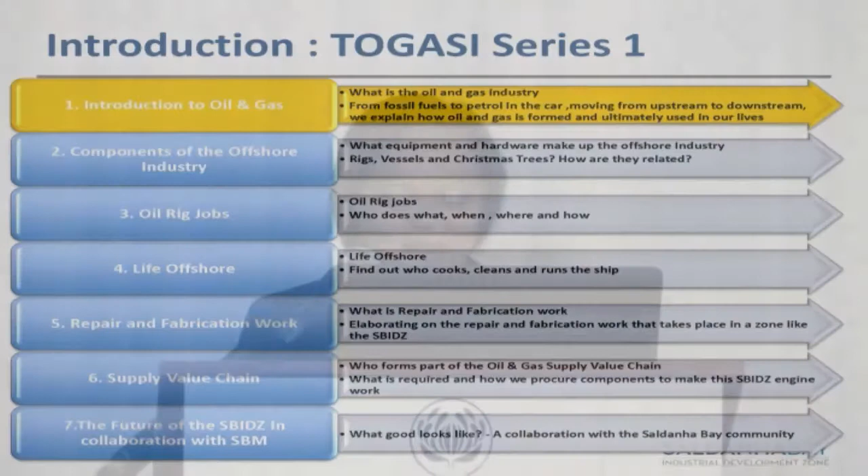Before I go on, Abby has already alluded to a little bit of some of my background, but I thought I would just give a personal mini biography of what qualifies me to stand here before you this morning.

I'm born and raised in Durban, a coastal town, so I do have a natural flair for seaborne trades, which can be lumped into marine, into maritime, and then with my experience it became also oil and gas. That's the other reason that has kept me going in the industry, and why I'm really looking forward to sharing this knowledge, as I find the seaborne trades, the marine, maritime and oil and gas industry very fascinating.

My background is in chemical engineering, so I moved to Cape Town to start my degree, and in my second year I received a scholarship to go to Germany to do part of my studies.

The reason I mention that is it opened up my eyes, and I realized I do not only have to limit myself to the mining sector, or just the petroleum refinery industry, or some of the other smaller companies that take up chemical engineering graduates, but there was a whole big world out there of so much else one can do with any engineering degree, but more specifically a chemical engineering degree. This is also a strong motivator, because through these talks that is exactly what we're trying to achieve, since sometimes the view is only limited because that's all we're exposed to and know.

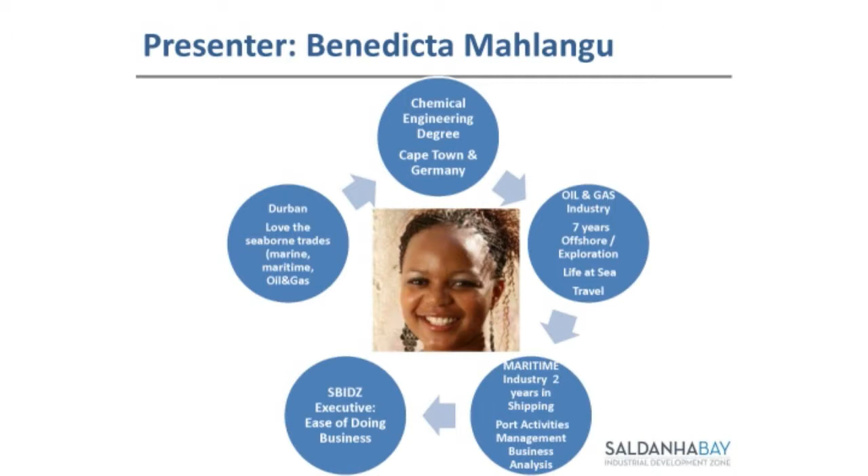This portfolio is to design and implement a model that allows our investors and business owners who operate within the zone to focus on their core business and not have to hassle about peripheral things like permits, visa issues, and processes of how to get their rigs in and out. It's about a model allowing seamless flow for someone coming to do the work they need, finding the parts, finding the workmanship, and getting out in the time designated to meet their further obligations.

That's enough about me. We now get on to real business, which is what is oil and gas. I'd like a show of hands to gauge the audience we have here today. How many people know about the oil and gas industry? I'm talking with regards to formation or rig work in a technical sense. A few people, okay, then I'm in the right place.

How I've structured these is I put in videos, very short animated movies. The reason being, it's much easier to get the visual of what happens sub-level with regards to oil and gas drilling and exploration. So without further ado, I'll start with the first video and then talk more into it after.

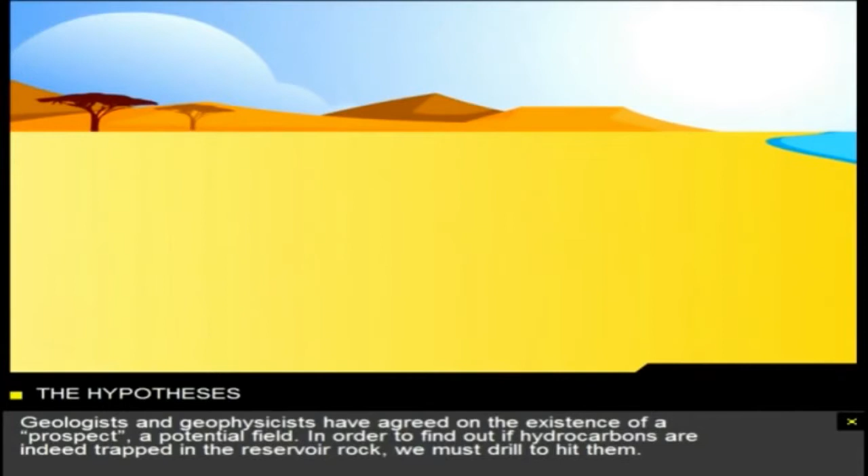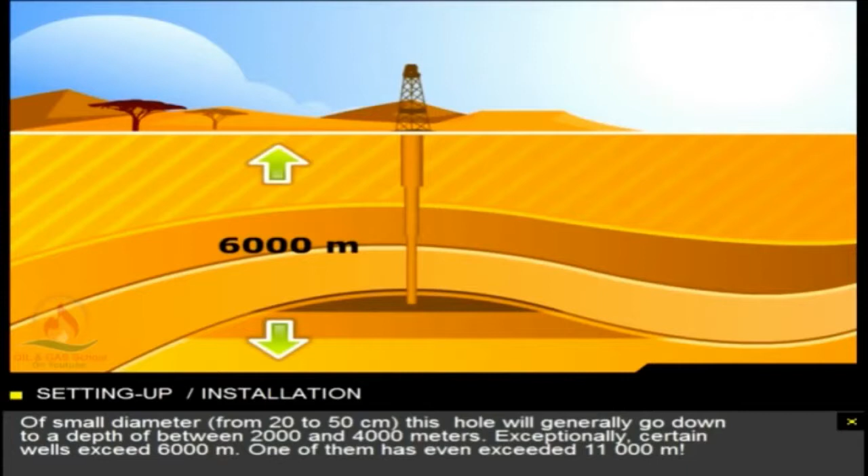Geologists and geophysicists have agreed on the existence of a prospect, a potential field. In order to find out if hydrocarbons are indeed trapped in the reservoir rock, we must drill to hit them. Bearing in mind the knowledge acquired about the substratum and topography of the land, the best position for installation of the drilling equipment is determined. Generally it is vertically above the point of maximum thickness of the geological layer suspected of containing hydrocarbons. The drillers then make a hole in conditions that are sometimes difficult. Of small diameter, from 20 to 50 centimeters, this hole will generally go down to a depth of between 2,000 and 4,000 meters. Exceptionally, certain wells exceed 6,000 meters. One has even exceeded 11,000 meters. Certain fields can be buried at a depth equivalent to the height of 12 Eiffel Towers. The derrick is the visible part of the drilling rig, a metal tower several tens of meters high. It's used to vertically introduce the drill strings down the hole. These drill strings are made up of metallic tubes screwed end to end.

That's just going through the various parts of the main frame structure that you would see, what we call topside of a rig. Although this is more of an onshore rig platform, it gives you the main components of what comprises the rig, which is the derrick, the drilling mud, and the pump that must be part of that structure and setup.

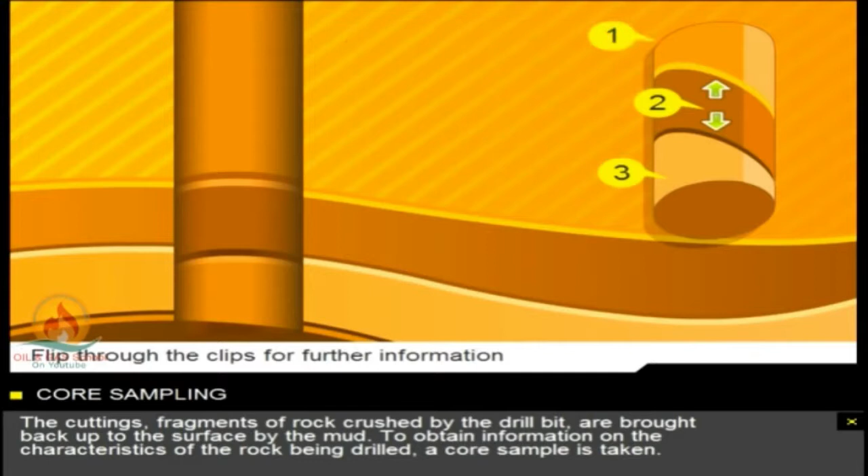And with each of these components within the drilling, this can last years in between. It's a very long process of testing and verifying and making absolutely certain you will produce actual crude oil that is usable.

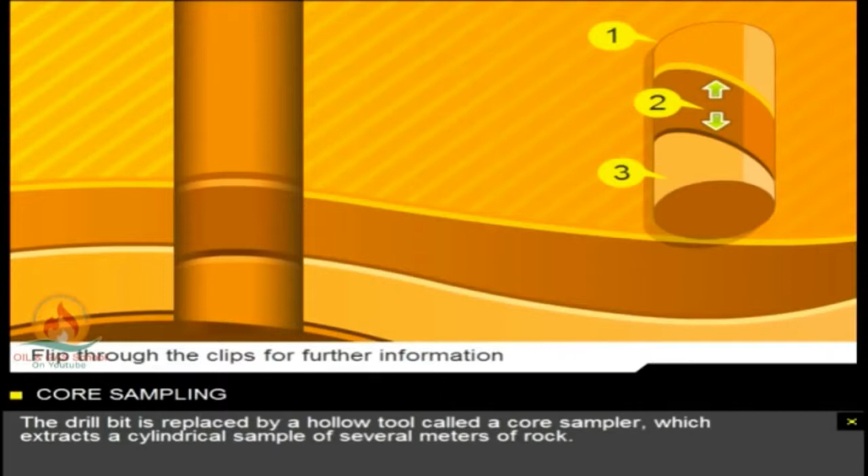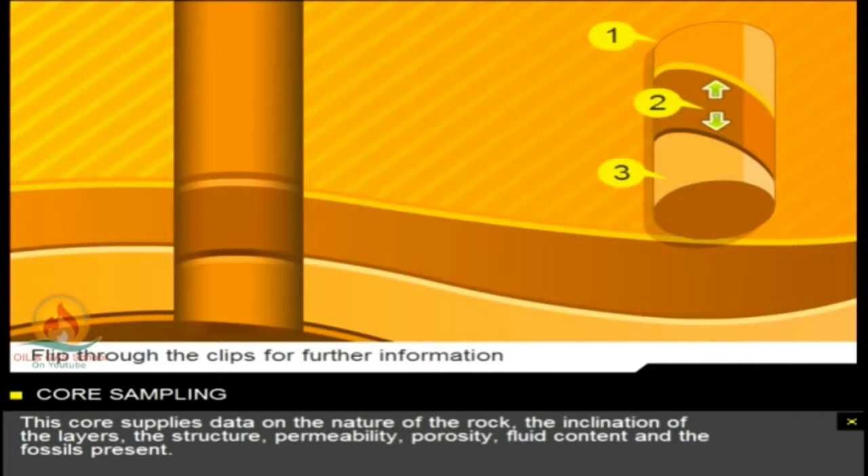The drill bit is replaced by a hollow tool called a core sampler, which extracts a cylindrical sample of several meters of rock. This core supplies data on the nature of the rock, the inclination of the layers, the structure, permeability, porosity, fluid content, and the fossils present.

After having drilled a few hundred meters, the explorers and drillers undertake measurements called loggings down the hole, by lowering electronic tools into the well to measure the physical parameters of the rock being drilled.

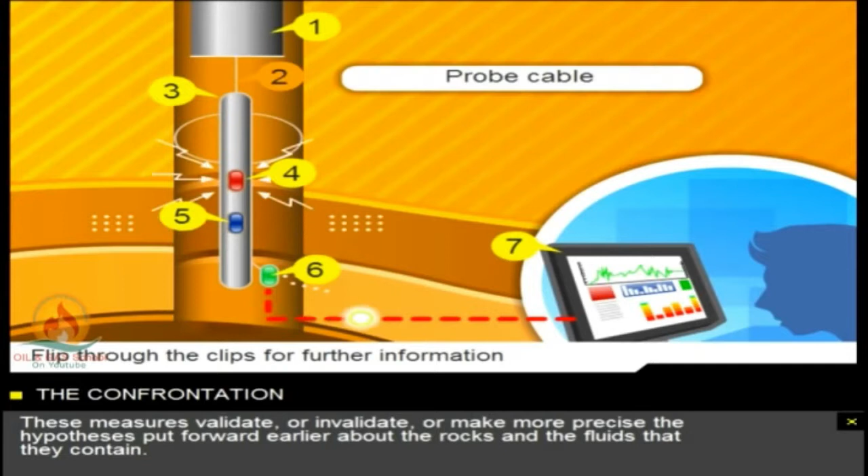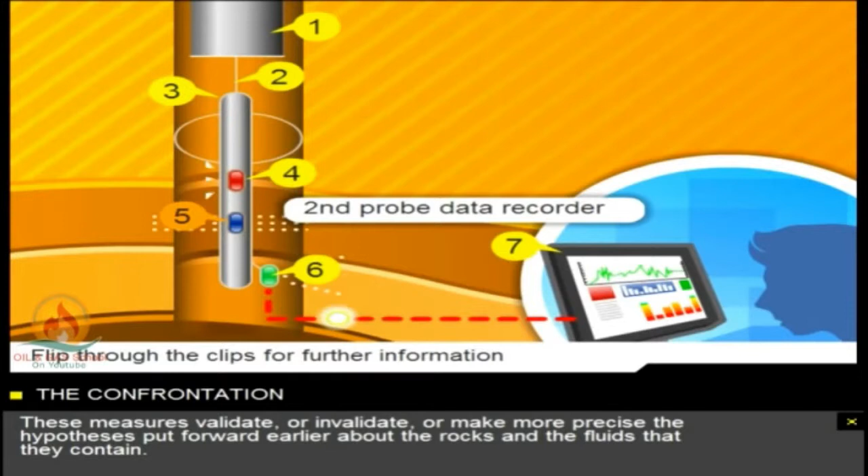These measures validate or invalidate, or make more precise, the hypotheses put forward earlier about the rocks and the fluids that they contain. The log engineer is responsible for the analysis of the results of the various loggings.

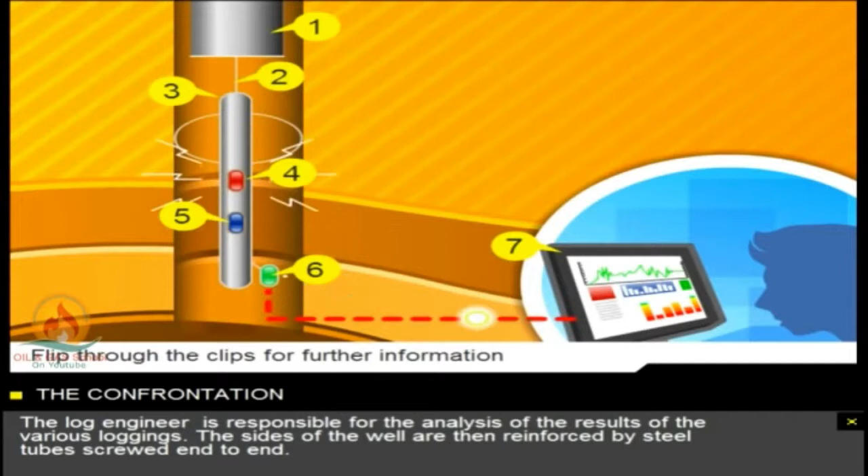The sides of the well are then reinforced by steel tubes screwed end to end. These tubes, called casings, are cemented into the ground. They isolate the various layers encountered.

When hydrocarbons are found, and if the pressure is sufficient to allow them to come to the surface naturally, the drillers do a flow check. The oil is allowed to come to the surface during several hours or several days through a calibrated hole.

You will see as I go through my presentation, crude oil is based around pressure and temperature.

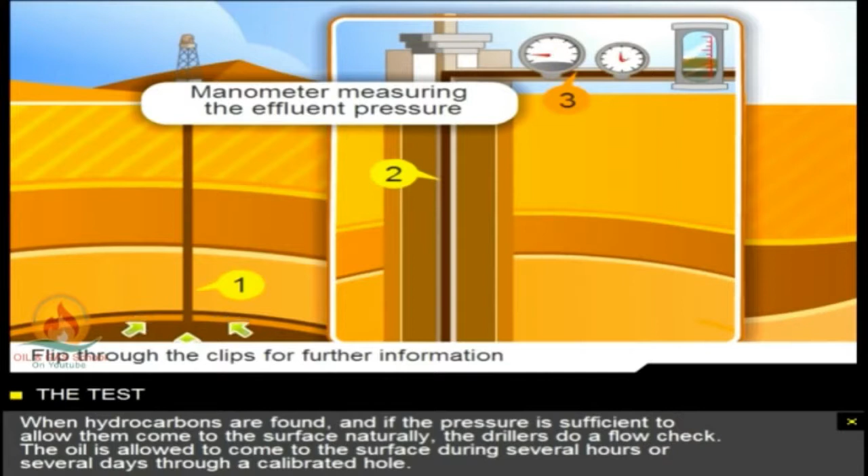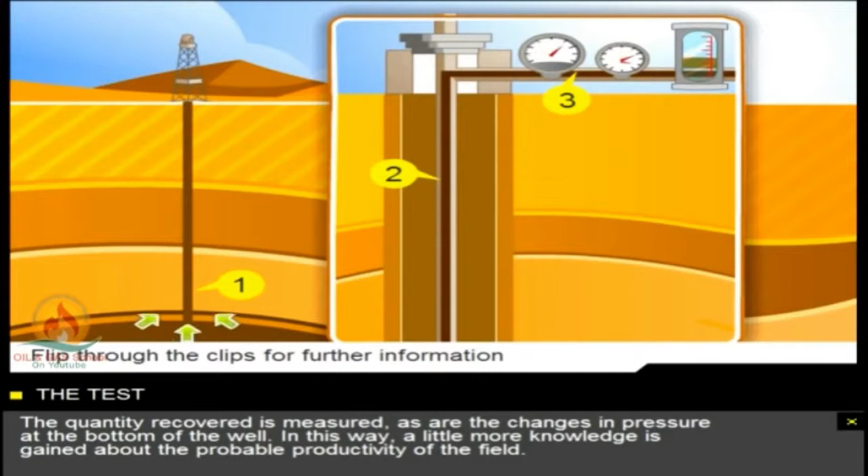The quantity recovered is measured, as are the changes in pressure at the bottom of the well. In this way, a little more knowledge is gained about the probable productivity of the field.

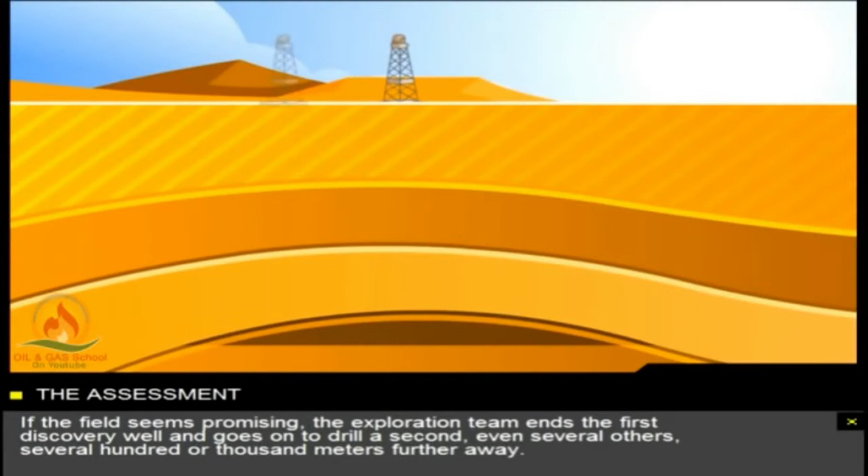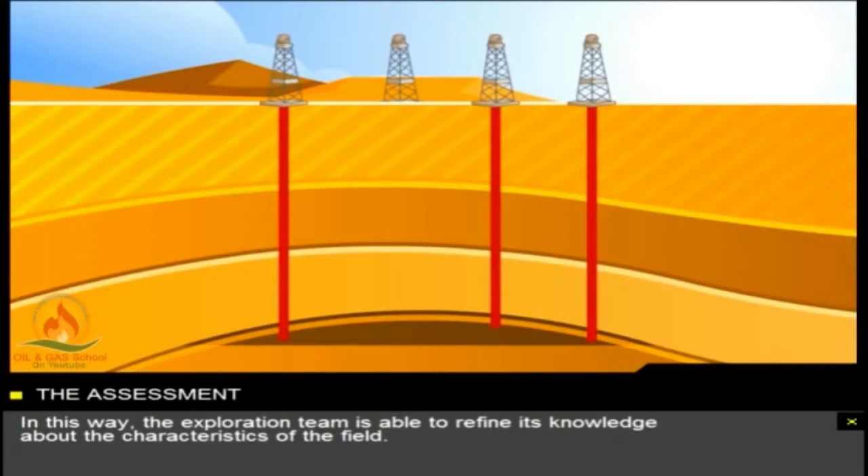If the field seems promising, the exploration team ends the first discovery well and goes on to drill a second, even several others, several hundred or 1,000 meters further away. In this way, the exploration team is able to refine its knowledge about the characteristics of the field. The decision to stop drilling is made only when all these appraisal wells have provided sufficient information, either to give up the exploration or to envisage future production.

I wanted to use this as an introduction, more of a schematic, and there is a lot of terminology involved with regards to the process that takes place. But the key thing to know is that it's a very long process timeline-wise, and there's a lot of specialists involved, from geologists, geophysicists, to drilling engineers, your well services specialists, people who only just look at the core samples and analyze that for some time to determine all the various properties that are required, necessary to deem that particular reservoir or well able to produce enough crude oil for it to be marketable.

I try to give a very simplified version of how crude oil is formed, and in essence, it is tiny plants, algae, and bacteria that died millions of years ago. They happen to just slowly deposit to the bottom of the ocean floor, which is the seabed, known as fossils, and they laid there.

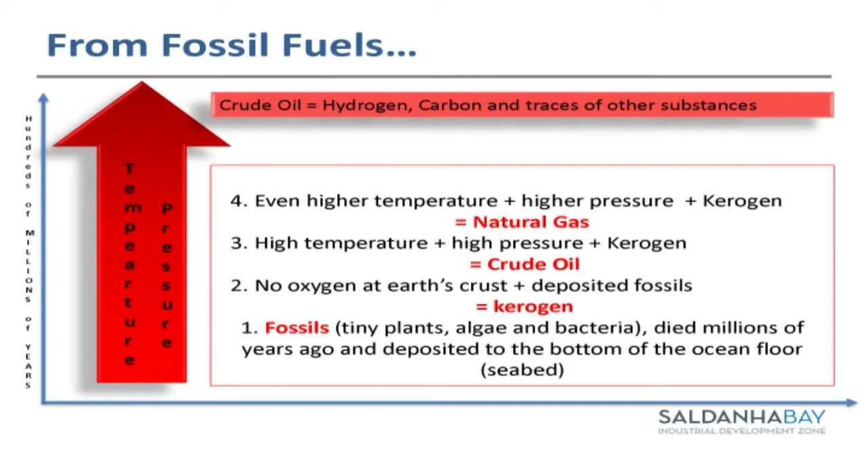Because at the core of the Earth's crust there is no oxygen, the combination of these deposited fossils with the lack of oxygen actually forms a compound called kerogen. The kerogen, with increasing temperature and pressure—because you can imagine there's more layers depositing, so the pressure builds up, and the temperature also increases because the core of the Earth is a very hot mantle—the combination of this is actually what forms crude oil. It's a very simplistic, in inverted commas, way of actually forming something that has so many more powerful uses in its end product.

And then with even higher temperature and pressure, it becomes natural gas. We know anything vaporizes and turns into a gaseous phase because of raised temperature or raised pressure. So that's what I mean by most of this being centered around pressure, playing around with pressure and temperature.

Also, what constitutes crude oil is hydrogen atoms, carbon atoms, and traces of other substances, one of them being sulfur. So how they term crude oil is when it's got a high sulfur content, it's known as sour crude oil, and if it's got a lower sulfur content, it's known as sweet crude oil.

The carbons in the chemistry are formed as chains joined together with hydrogen atoms around them. The ones with longer chains are known as heavier crude, and with fewer carbon atoms, known as lighter crude oil.

So if you hear in the news when they talk of the benchmark for crude oil prices, they use Brent oil. Brent crude oil is found in the North Sea, and it is almost the sweet spot crude oil in that it has the lightness required, but it's also sweet in that it doesn't contain as much sulfur, and it has light enough carbons in it.

This is actually what we term petrol in South Africa. It's called gasoline in the US and other parts of the world. Its chain only really has 8 carbons. The good thing with gasoline is that it is light, so it's good for motor vehicle cars because it vaporizes very quickly, and so it's used basically in a combustion engine kind of process.

Then we get kerosene. Kerosene in South Africa is also known as paraffin, so you would have the paraffin oil used in paraffin lamps.

Then we get gas oil, or diesel as we know it. The interesting thing with diesel is that initially, because it's a heavier output of the crude oil, so it's more of a carbon chain, it used to be used for heavier industrial machines like trucks and working cars.

But over the years, there's been a move toward getting motor vehicles built to also take diesel. The interesting thing with that is it changes the market a little bit, because your feedstock of crude oil is determined by the market that will take off these products.

If you're wanting more of a gasoline output out of your refinery, you need to feed it with crude oil that is lighter—so you want a light crude oil to be your feedstock. And if you want more of a heavier product, the refineries are actually purpose-built for the market in which the end customer would be making use of the crude oil.

Which is why you get crude oils being blended, because you rarely find that pure crude oil that will give you the exact quantities or properties you're looking for.

And then just looking to the remainder of the products, you get lubricating oils. These are very sticky—they stick to the materials, and they prevent rust.

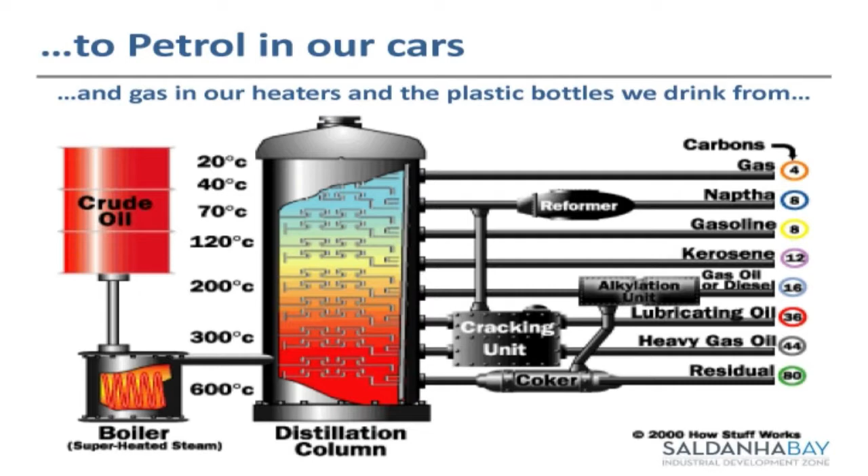Heavy gas oil, also known as marine gas oil, is used in ships and some industrial uses. Residual makes up waxes and the tarmac used in our roads. That's all forming, almost to the quality of a crude oil. It's thick, it's smoky, it's dark, very viscous, and a very heavy outcome of the refinery process.

Our next topic is upstream, midstream, and downstream. As mentioned in the introduction, the basis at this stage is just to give the definition of what sits where. I will start with a video, then give a brief description thereafter.

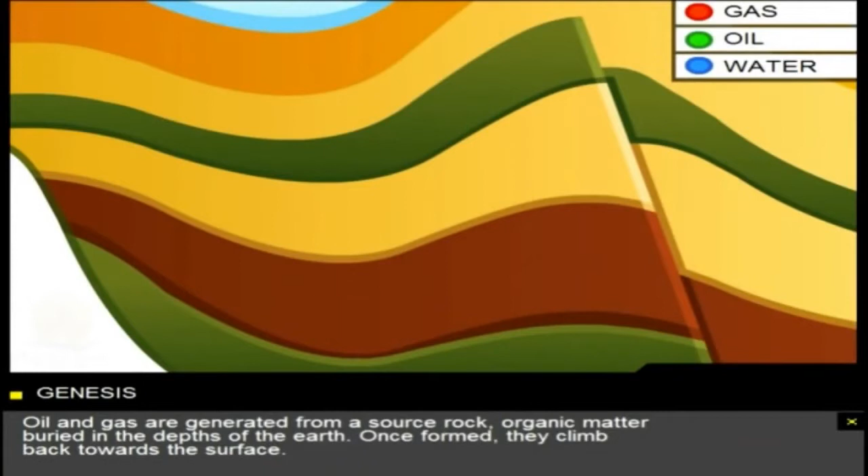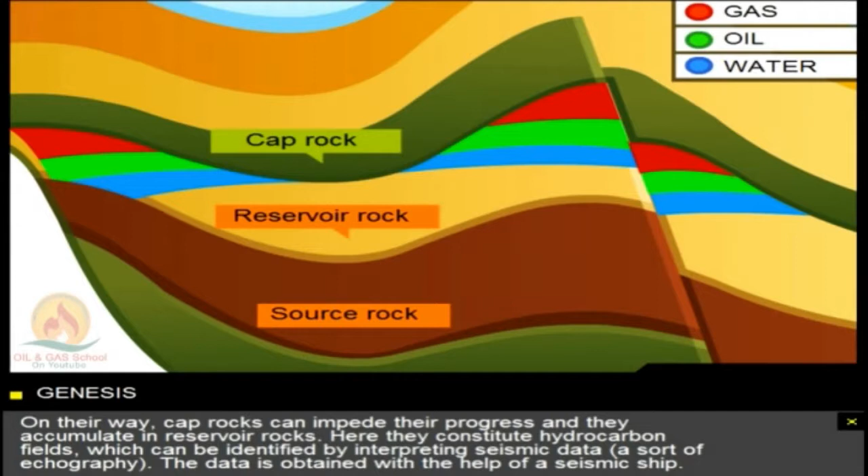Oil and gas are generated from a source rock, organic matter buried in the depths of the earth. Once formed, they climb back towards the surface. On their way, cap rocks can impede their progress, and they accumulate in reservoir rocks. Here they constitute hydrocarbon fields, which can be identified by interpreting seismic data, a sort of echography. The data is obtained with the help of a seismic ship.

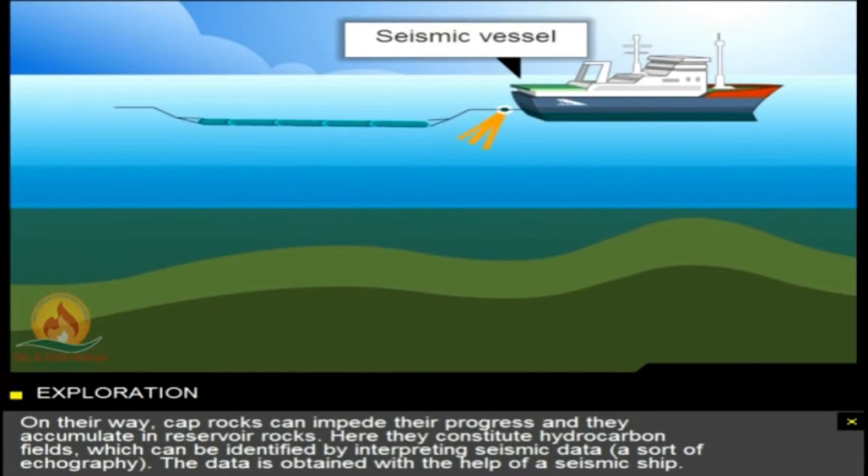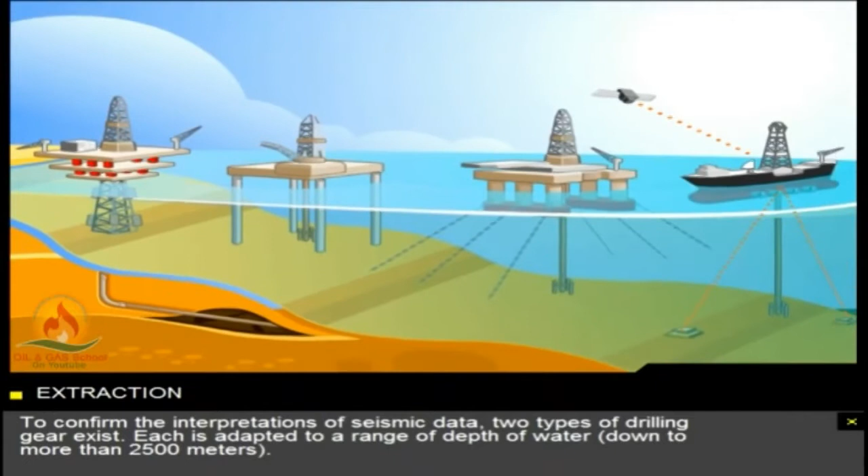To confirm the interpretations of seismic data, two types of drilling gear exist. Each is adapted to a range of depth of water down to more than 2,500 meters. The platform seen here is a semi-submersible which floats and retains its stabilized position by means of anchors fixed on the seabed.

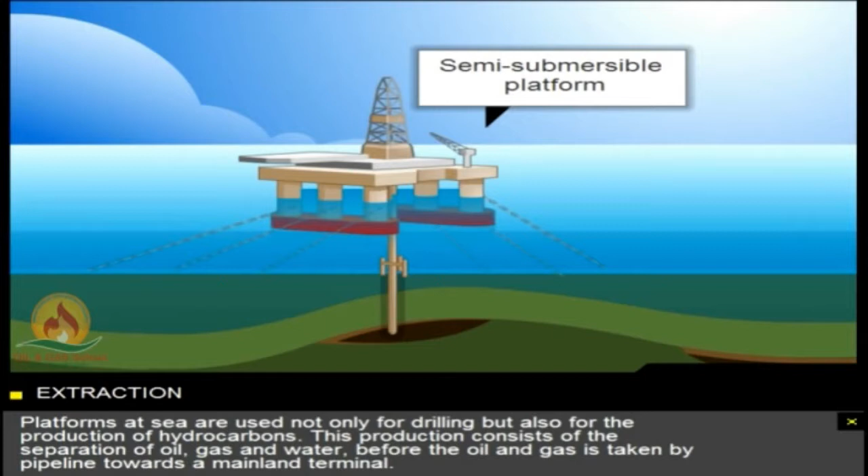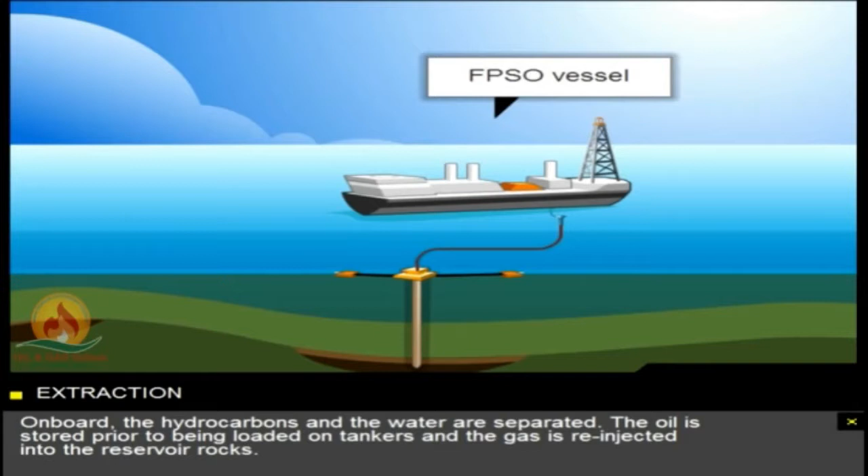Platforms at sea are used not only for drilling but also for the production of hydrocarbons. This production consists of the separation of oil, gas and water before the oil and gas is taken by pipeline towards a mainland terminal. Where it's impossible or too expensive to link the field to the coast by pipeline, an FPSO ship is used - floating production storage and offloading barge. On board, the hydrocarbons and water are separated. The oil is stored prior to being loaded on tankers, and the gas is re-injected into the reservoir rocks.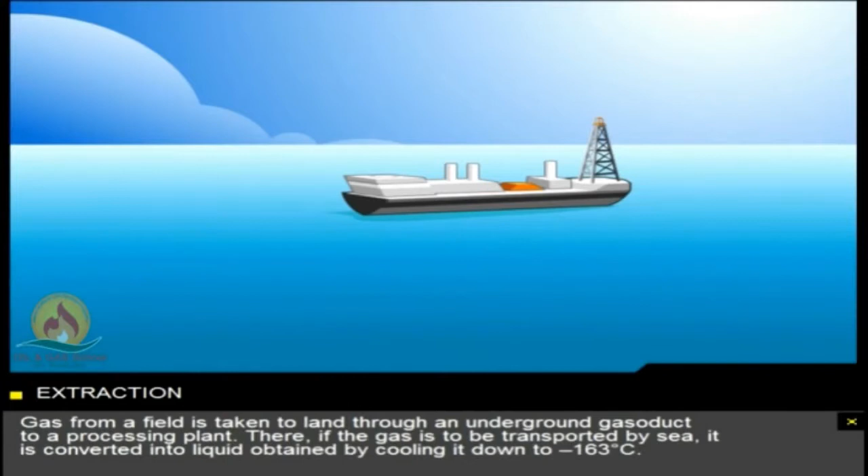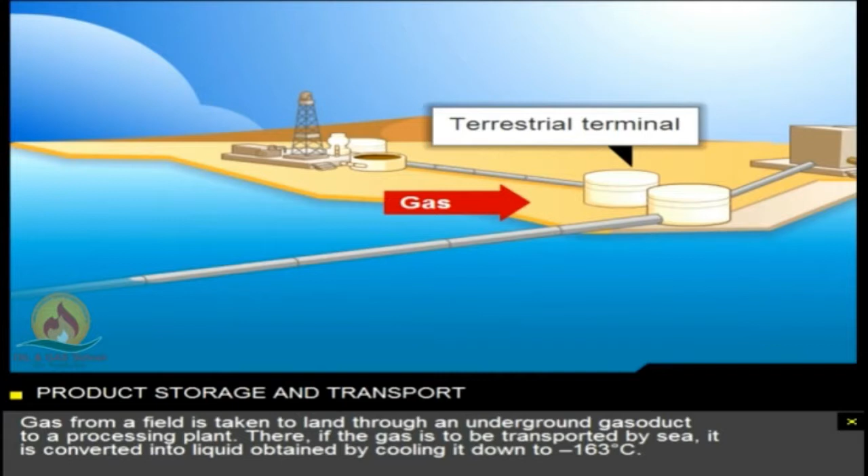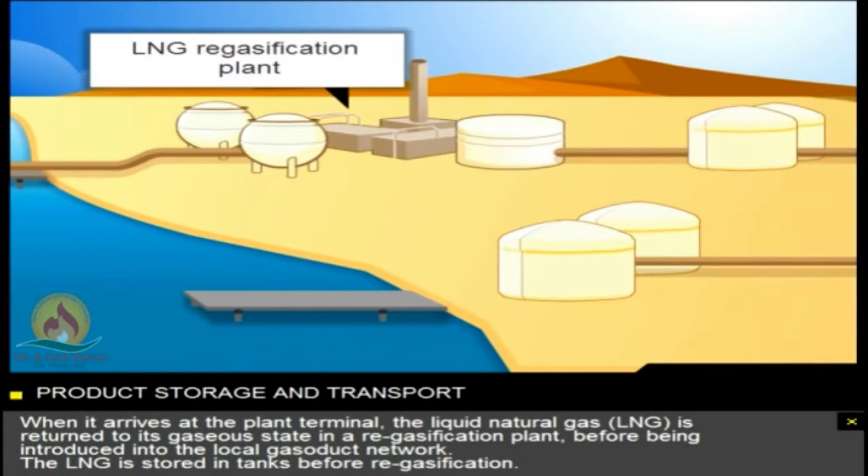Gas from a field is taken to land through an underground gasoduct to a processing plant. There, if the gas is to be transported by sea, it's converted into liquid by cooling it down to minus 163 degrees Celsius. When it arrives at the plant terminal, the liquid natural gas, LNG, is returned to its gaseous state in a regasification plant before being introduced into the local gasoduct network. The LNG is stored in tanks before regasification.

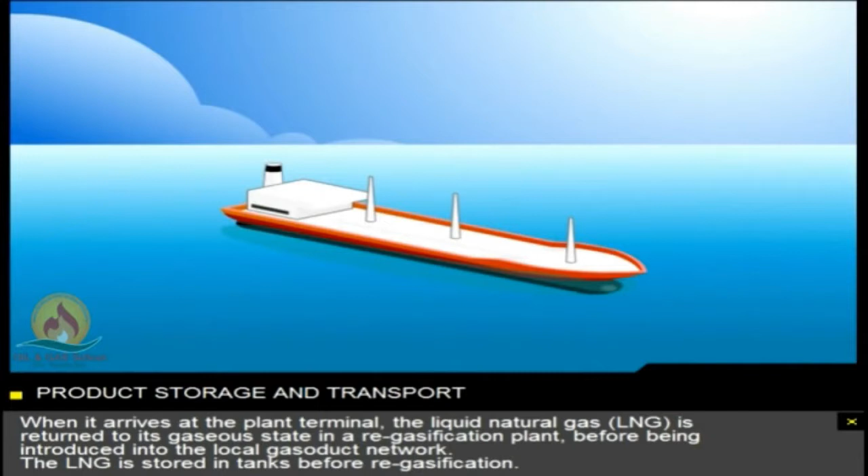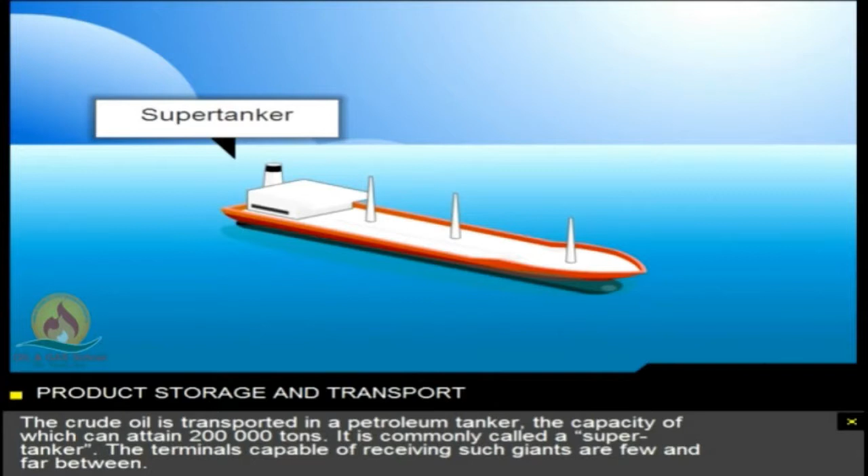The crude oil is transported in a petroleum tanker, the capacity of which can attain 200,000 tons. It's commonly called a supertanker. The terminals capable of receiving such giants are few and far between. The ships used to transport crude oil produced on an FPSO ship are of a much smaller capacity. The crude oil, before being refined, is stored in the port in large capacity tanks.

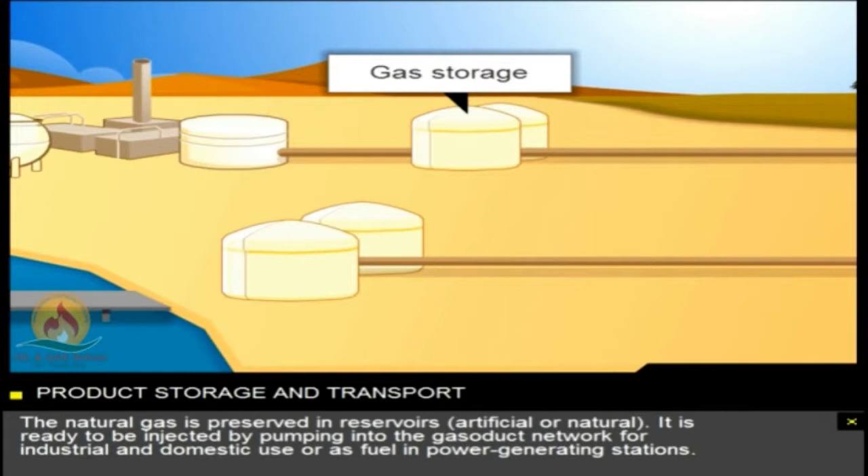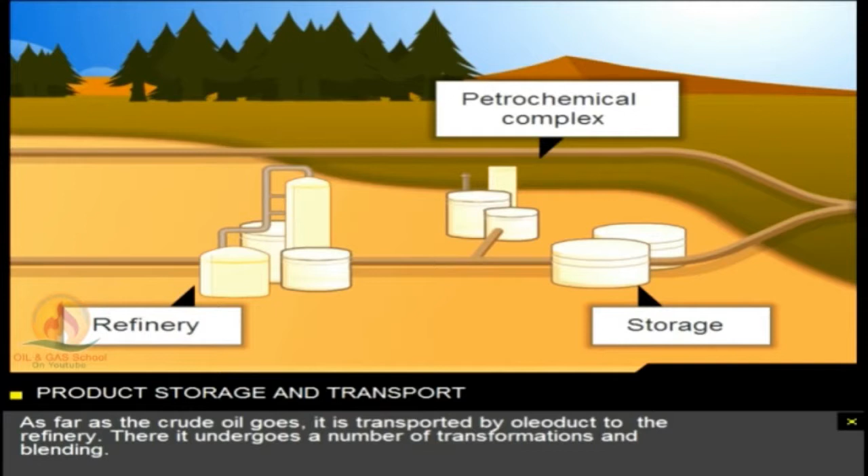The natural gas is preserved in reservoirs, artificial or natural. It's ready to be injected by pumping into the gasoduct network for industrial and domestic use, or as fuel in power generating stations. As far as the crude oil goes, it's transported by oleoduct to the refinery. There it undergoes a number of transformations and blending. A variety of finished products are obtained: LPG, petrol, kerosene, diesel, or naphtha, which will be used as the basis for the composition of plastic products.

So, just in a very simplistic form to explain, upstream is what is involved with exploration and production. So it is all the activities that take place offshore with regards to drilling and basically the extraction of crude oil and natural gas.

Midstream, however, gets a little bit muddled with the downstream processes. You find that more in countries such as South Africa, where we don't produce crude oil ourselves. So in countries like the Middle East or America, you would find that they have a very distinct midstream, which is actually the storing of the crude oil, the marketing to the various refineries, and the transportation - not to be confused with the retail transportation, which is trucking of the finished products from the refinery, but the transportation of the crude oil or the natural gas to a facility that will be used for further processing.

So that actually is the correct definition for midstream, but we mix it up a little bit in South Africa, and we sometimes then will interchangeably include refineries or gas processing plants, which are in essence downstream, under midstream, as well. But the distinction for sure for downstream is then the retail and distribution of these products that you find primarily from the refineries, which I've mentioned in the previous diagram.

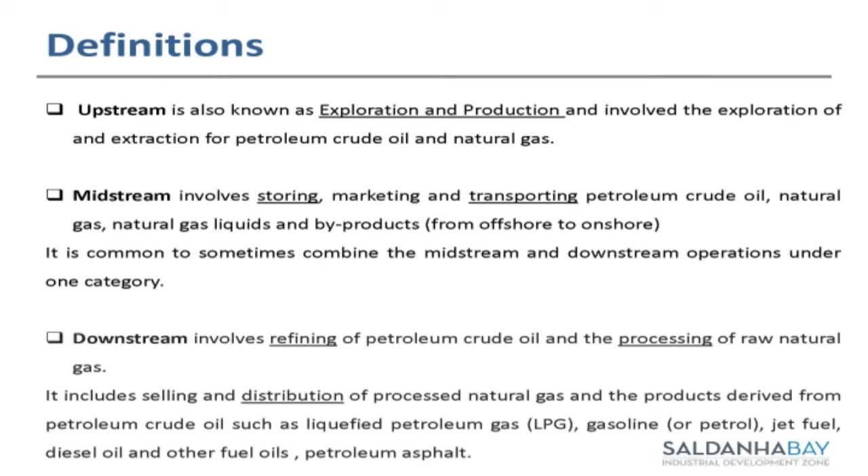To go into more detail, upstream is made of key players. I'm just giving examples: you'll have rig owners who own the actual equipment used to drill. They may also hold the operating license, so these are the oil companies, or not. You'd have a Shell, a BP, or PetroSA with licensing rights to extract from an offshore field, and they'll hire someone's rig for operations, getting an oil services company, such as the one I worked for before, Schlumberger, to drill and maintain that well or production over the life cycle of that reservoir. But there are specific players in these industries, and some who play across the entire upstream sector.

Then between midstream and downstream we've got transportation, which is moving goods from offshore to onshore facilities. And then you get refining and processing. I've written these separately, but they're basically all going together.

Crude oil refineries - we have CalRef in Cape Town, which is owned by Chevron. Chevron has the rights, it's their crude oil, and then Caltex distributes the end products. In Durban, south of Durban, we have SAPREF, a joint refinery for both BP and Shell. Then we've also got the gas plant in Mossel Bay, that's purely a gas processing plant, so their feedstock would just be gas.

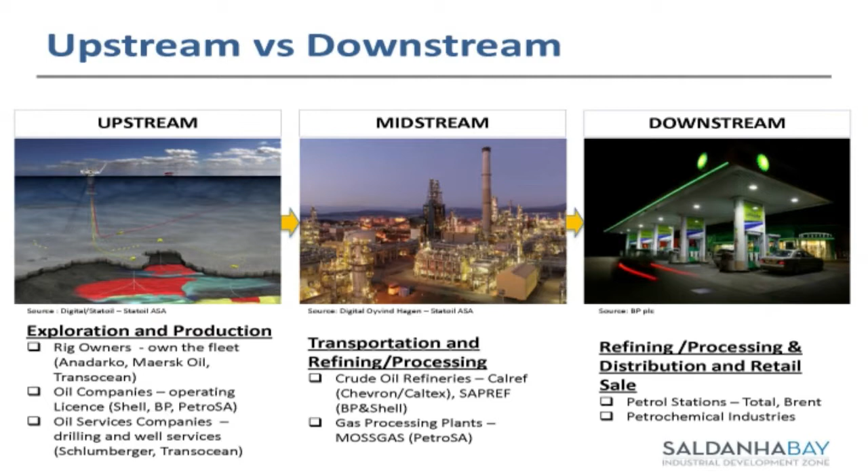With regards to distribution and retail sale, we have petrol stations - the actual selling of diesel and petrol is termed distribution and retail sale. Then there's the petrochemical industries, which take off some of those products. It could also be for the road, for the construction industry's use of tarmac.

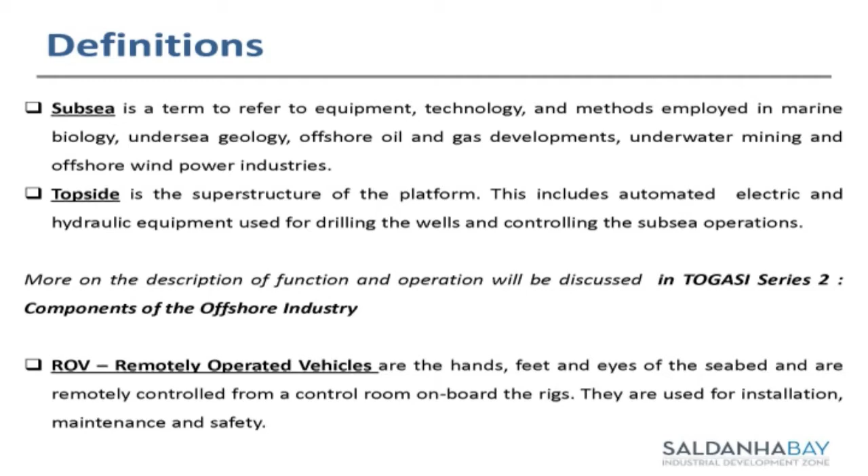Subsea and topside - again similar to defining upstream, midstream, and downstream. It's good to understand that a lot of the equipment we'll be getting into is actually found subsea as well. The companies doing a lot of manufacturing - that's where the real action takes place, is actually subsea. Topside is what is visible above the water level.

I will start off again with a short video. There's no text to it, but maybe you can just watch. It zooms into what we call a remotely operated vehicle going down to show the structure into the well or the subsea floor.

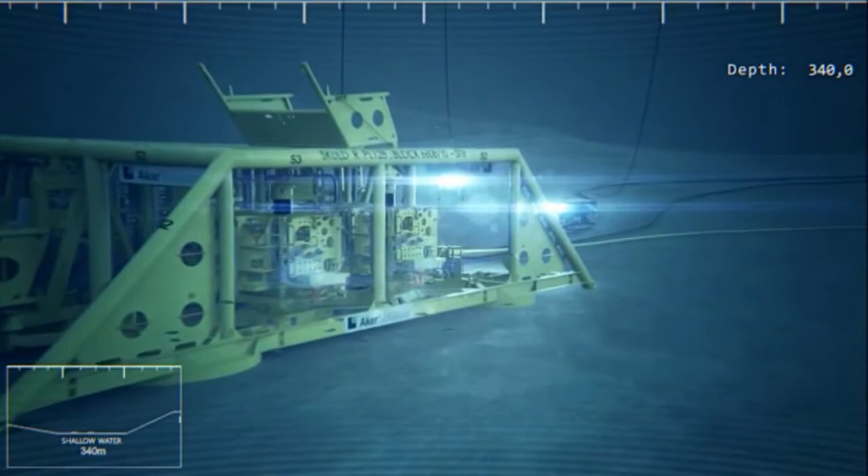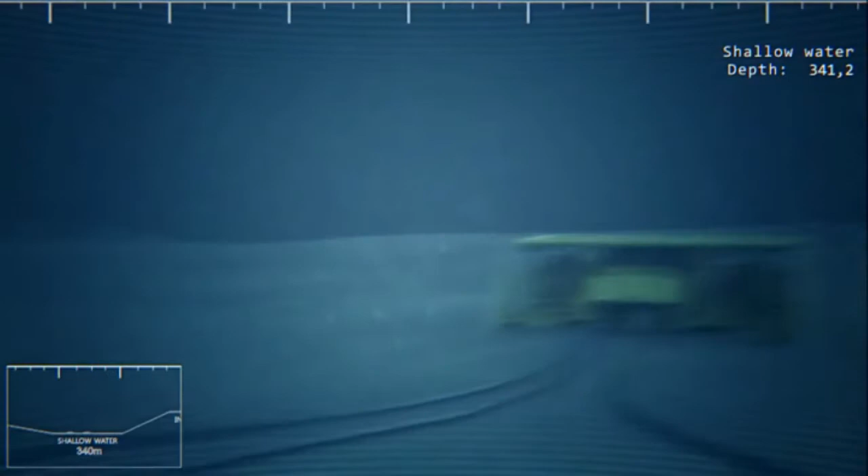The low-hanging equipment - that's what we call the remotely operated vehicles, which are basically the eyes, hands, and feet. They are the human element below the water, telling the engineers on the rigs what is actually happening with the equipment at the bottom.

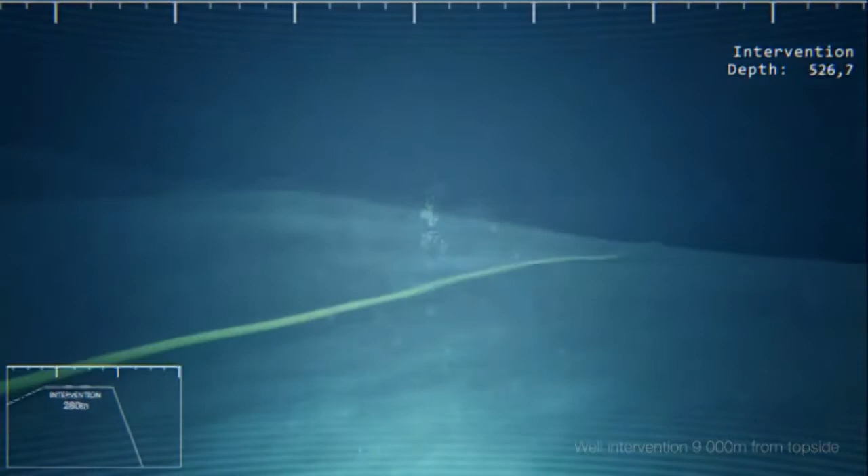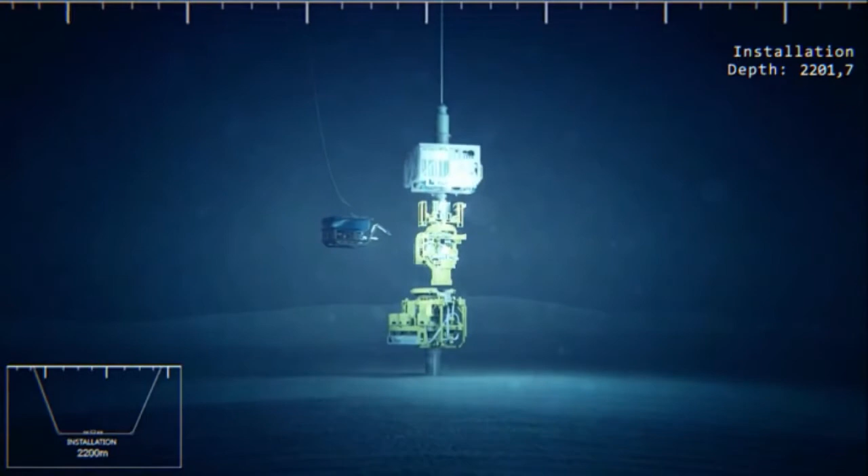And all that piping you see connected is flowing, transporting the crude oil, the gas, and sending telecommunication lines to operate the various pieces of equipment found on the seafloor.

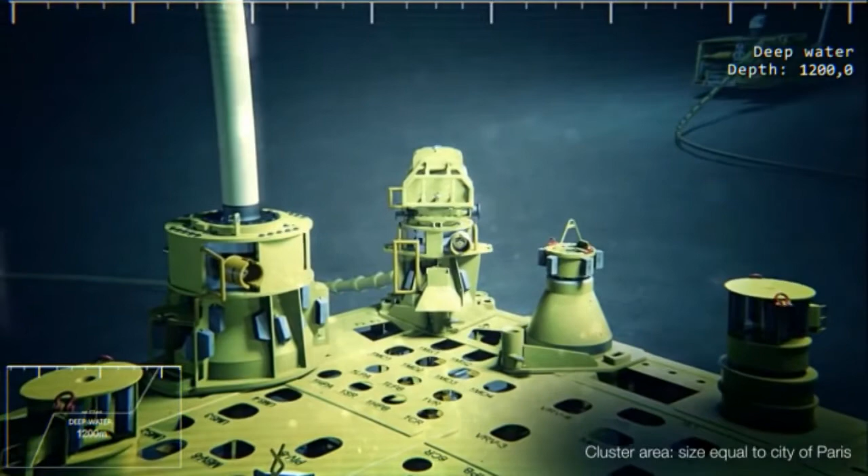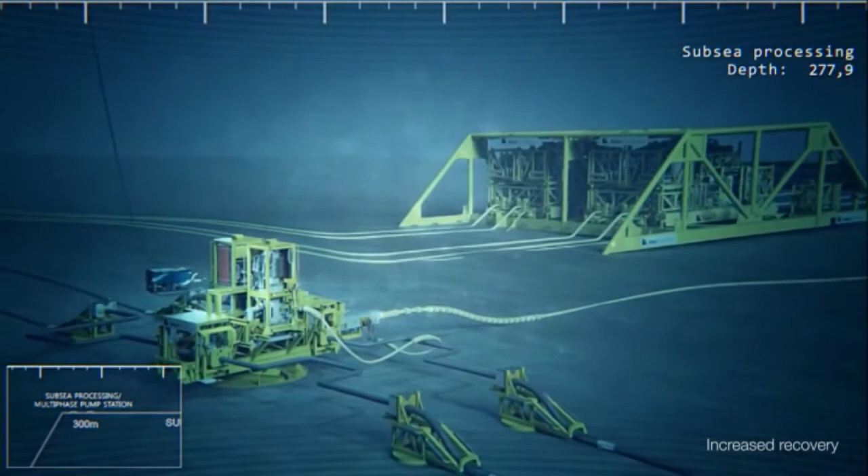The size of something like that is huge - it could take up basically this whole front area where we're standing. From where the chairs are ending to the back of this wall - these are massive pieces of equipment found in the seabed.

I like that slogan because the subsurface is the new surface. It's truly fascinating how much - when you look at the platform physically, never seen with our own eyes - you only can view it via a control room or in videos like these.

To go into the definitions again, subsea is not a term only for the oil and gas industry. It's self-explanatory, below sea level, below water level. It refers to the equipment and technology employed in marine biology, undersea geology, as well as offshore oil and gas, underwater mining, and offshore wind power industries. All of this is termed subsea, so it's not specific only to the oil and gas industry.

However, topside is the term used for the superstructure or the platform. In the first video's animation, I showed the derrick and the main frame rig component with the drill bits - that is what you call the superstructure, which is raised above the water level. That's where the automation takes place, with the pumps and the drilling that must go through.

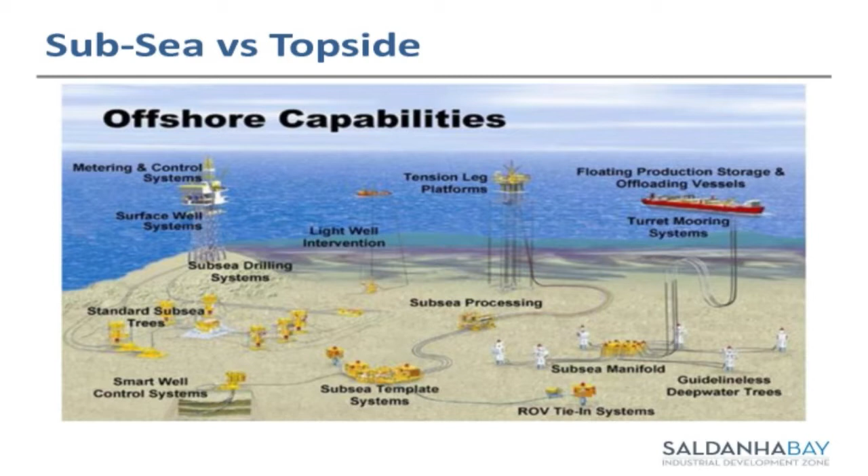This schematic just highlights the various components you can find. I wanted to draw everyone's attention, I don't know if some of you still remember the big catastrophe in the Gulf of Mexico back in 2010 with the BP oil spill. What happened was one of these components, on the subsea, it's not in one of the labels there, but it's called a blowout preventer. Because in essence, when you drill, the drill bit goes through the water, hits the surface of the seafloor, and then starts drilling below the surface of the seabed.

And like we mentioned, there are very high pressures and temperatures, so you're almost pricking into a ready-to-erupt liquid. If the equipment you're lowering doesn't have enough pressure, the mud doesn't have enough pressure to keep it down, it can, in essence, blow out. So what they build is what they call a blowout preventer. It's meant to cut off the circulation and plug the hole. If it's programmed to a certain pressure limit, okay, here's a problem, shut it off. It's almost like a safety valve, if you know how those function.

And what happened in the BP incident is that the blowout preventer hadn't gone for maintenance, or well, the jury's still out, I don't want to be caught having said the wrong thing. However, the issue was around the fact that it hadn't been well serviced, so it didn't activate in the manner it should have to actually plug the hole when it needed to.

This is also something quite key that I'd like to mention: we are dealing with health and safety hazards when companies in the Saldanha Bay IDZ entrust us to repair and maintain equipment that could potentially harm marine life and thousands of lives. So it's very important that we do world-class work with this equipment as it comes into the zone.

In this schematic, what they often do, which saves a lot of cost, is have a pipeline going directly from the field into the refinery. You also find this in countries that have that setup. It really is a massive network - you'd be surprised that in some parts of the world, underneath where you're swimming, is this whole network of piping going through to a refinery or processing plant.

The oil and gas supply value chain - this topic we'll delve into in series 6, but for the context of this introduction to the overall series, I want to highlight that the supply value chain is very broad. There's so much, so many components, so many different players that come into the supply chain of the oil and gas industry.

Just to give context, this would be, for example, the oil companies or the people who have the rights to extract or explore a field. They look at assessing the field, trying to acquire, explore, develop, and produce. The timeline from assessment all the way through to production can be anything up to 15 years, so it's not something that happens in just a couple of years.

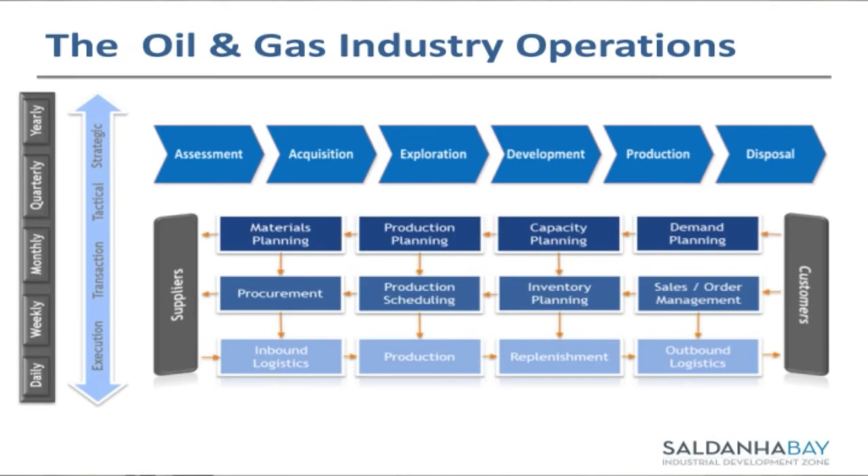The tricky thing is, just like any market, you've got suppliers who are supplying the crude oil - they're the people drilling it, they got the rights, they found how many barrels of crude oil they can make per day. This ultimately feeds into refineries in these markets, and that's our customer end. But the time frame from working out those economic and financial calculations to when you're actually going to sell it can be 15 years. So you get situations like this year, where the price drops, and the people who get hit hardest are the upstream industry, because their entire production planning was hinged on how much they could sell this crude oil for.

I did mention we'll be sending the presentation to participants, so I won't go into great detail with some slides like this one, but I wanted to highlight it. These are your typical industry players, categorized with regards to who you'd need - people in logistics, oilfield chemicals, rig repair - people who specifically perform those functions.

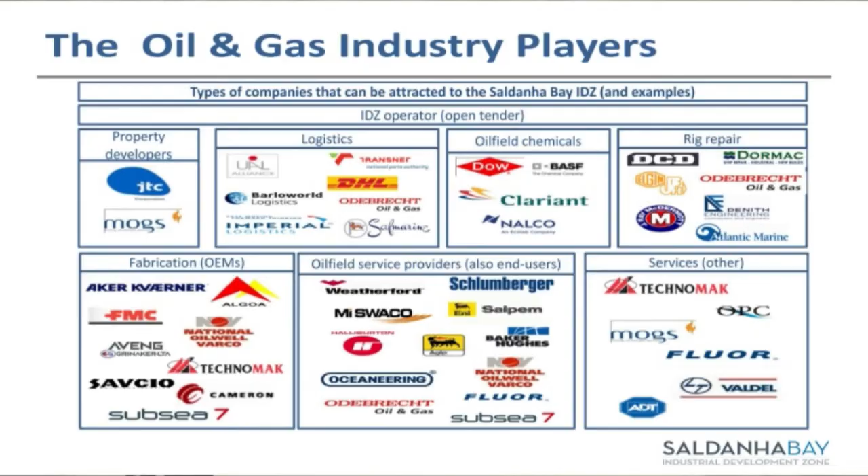You get the fabricators and the oil services providers. They all have some role to play. In some instances, when a rig owner has a problem, they may have to contact the oil company who has the rights, to schedule when maintenance and repair happens. Then they need to make sure they have the parts, so logistics comes into play, and they need to make sure they have the people ready who do the repair work. It really becomes a whole big network just to organize getting the work done with regards to the oil and gas services industry, repair and maintenance work.

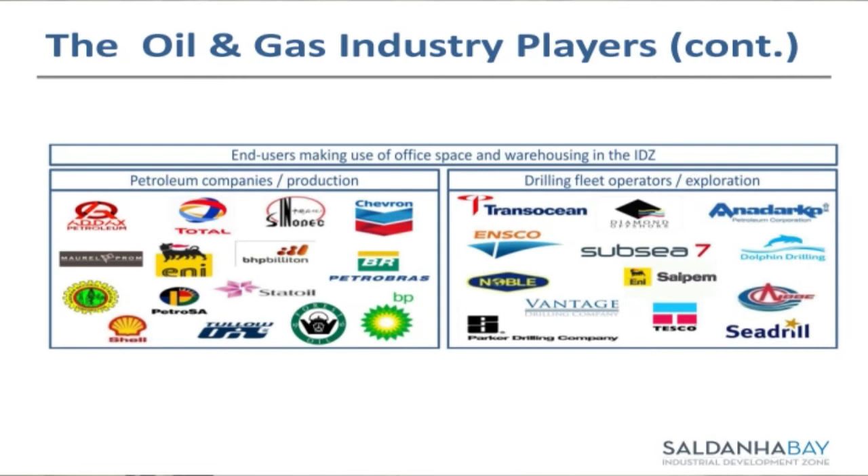Just another slide showing the petroleum companies, some logos you may recognize - PetroSA, BP - and these are the people who own what we call the drilling fleet, so they own the rigs and it's their responsibility to maintain them. They're also key players because they can decide to bring their rigs to Saldanha Bay IDZ for repair and maintenance work.

In this slide, if you just look through the central line, you've got your value chain - so you get exploration, and that's got mainly to do with the oil and drilling companies.

Reports on viability of the drilling site are basically their output, their guiding document for profitability of moving forward. Then you get production, which is your oil companies specifically - how much of the crude oil and natural gas can they actually produce to feed into refining, to be able to have petroleum products. Then you get into the players being the oil companies and some of the marketing, who buy those products.

The other one I put in there, petrochemicals, is also to highlight that crude oil is not only for refineries, it's not only for fuel, but you also have petrochemicals. You've got a massive offtake for the pharmaceutical industry as well as the polymers that are used in plastic products.